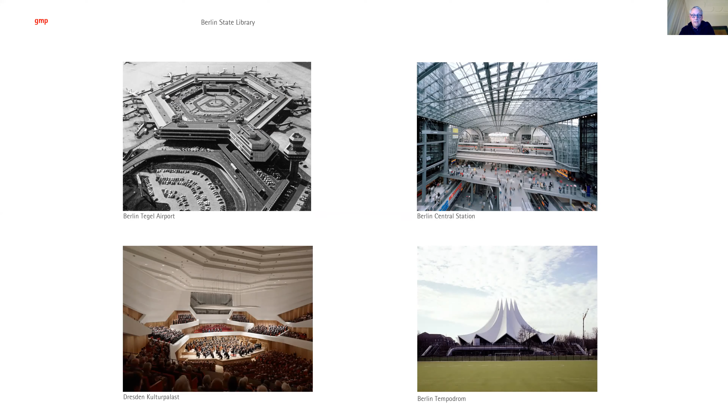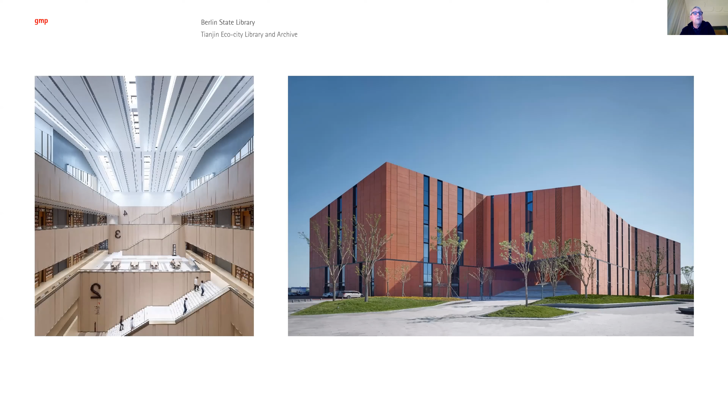And this is a quite interesting one. It's a library which is included and integrated in a bigger building coming from the 60s, next to a concert hall, exhibition spaces, and restaurants, a hybrid building in the city of Dresden.

In 1964, he won the competition for his largest project and his last project, the State Library in Berlin. This is this building, the bigger building in the background. He never saw the building completed since he died earlier than its completion.

Because of the deck-like terraces in the lower part and the big steamboat chimney on top, which serves as a magazine, this building is called the Bookship here in Berlin. It opens up to the west, where the architect Scharoun already realized the Berlin Philharmonie, great concert hall of our city, and where Mies van der Rohe previously completed the gallery of the 20th century.

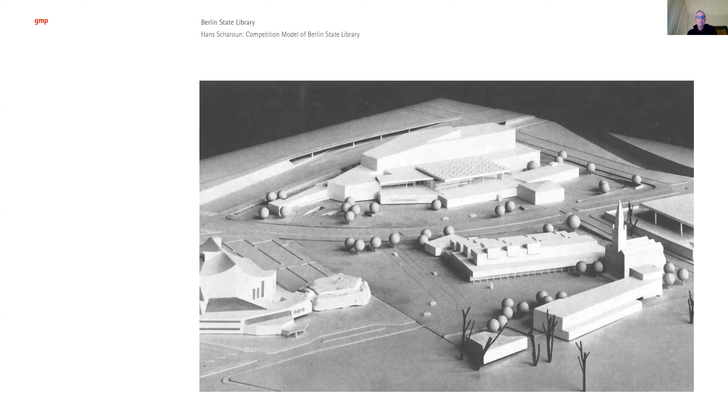The building had a clear backside where the extension of a highway was planned. And until today, this cultural forum we saw on the competition model so far is seen as a very critical urban project. Before the Second World War, this area was densely built, as can be seen on this picture, and the red frame marks the later position of the library.

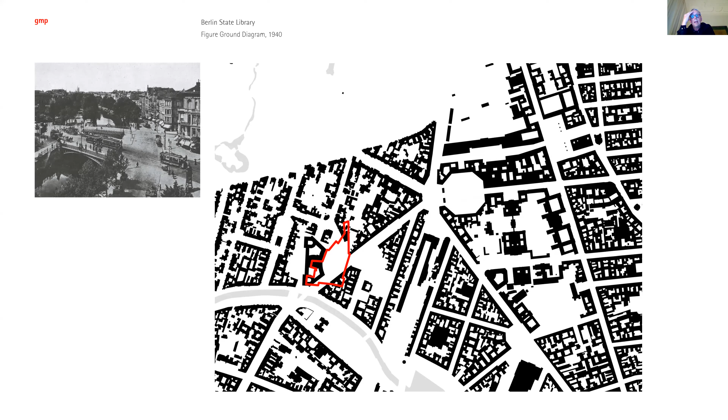Demolition in the Second World War made this area a vast place in the center of the city, a place that many different visions were conceived by architects and urban planners. Vastness is always a good start for visions, let's say.

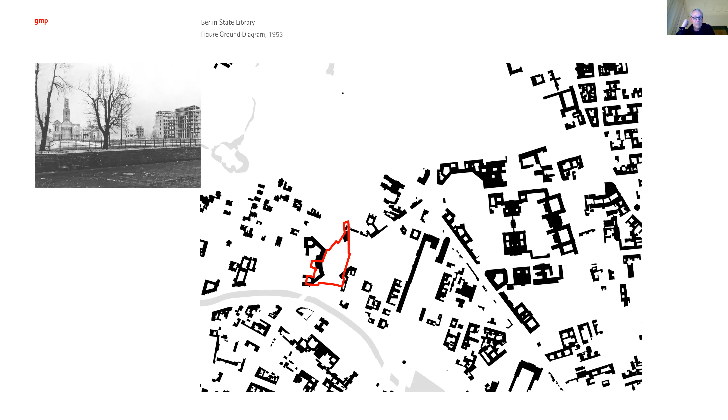The post-war planners broke the traditional city structure consisting of blocks, streets, and squares. Hans Scharoun proposed an open landscape-like space consisting of big solitaires, as seen in the model: the Philharmonie, the National Gallery, and the State Library.

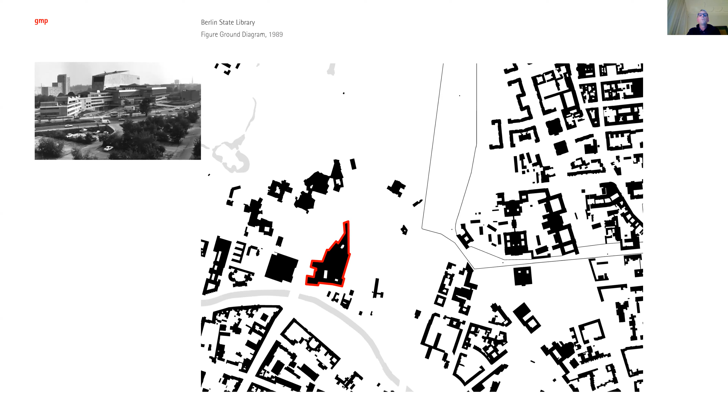And now we make the jump. We look at what happened after the wall came down, the Berlin Wall.

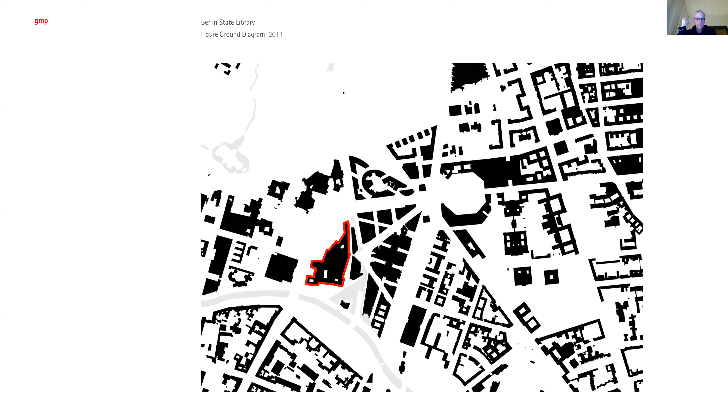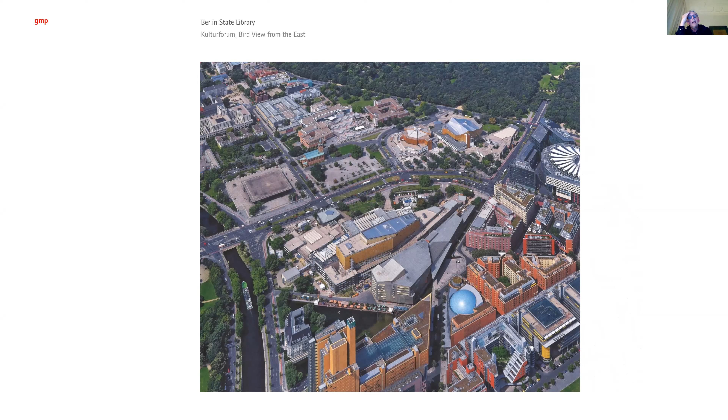The city structure to the east of the library was redesigned by architect Renzo Piano in a dense and compact way, so the position of the library in the city completely changed. He proposed a casino in a kind of back-to-back position to the library, and in this new arrangement he already thought about how to orientate the library towards his rebuilt new district to the east.

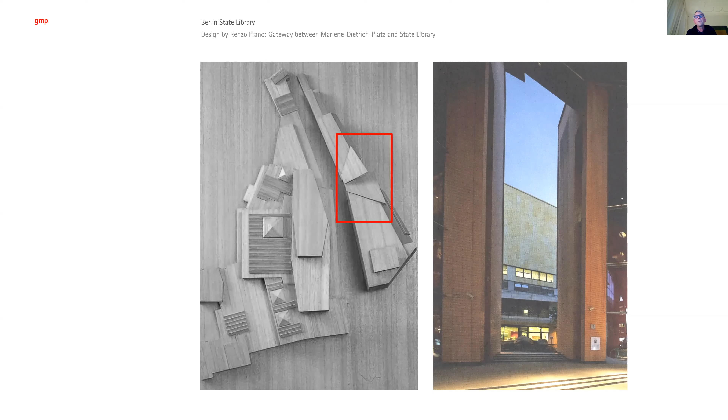That's why he built the most surreal gateway in Berlin. Once you come to Berlin, you can see that - on the right-hand side, a gateway to the backside of a big building. And once you pass this gateway, you find yourself in a quite desperate back street between two gigantic buildings.

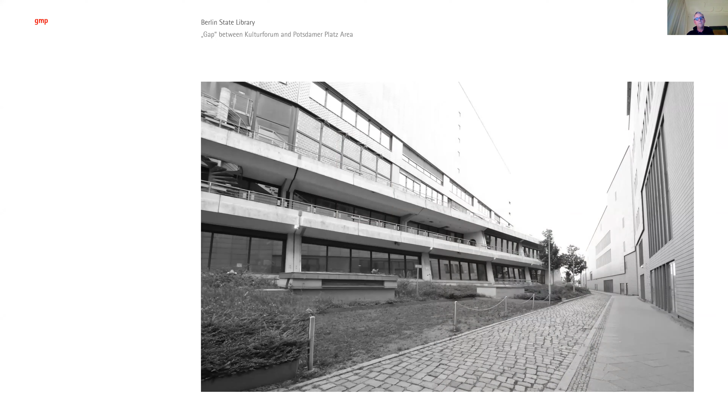But once you turn your head southward in direction of an artificial lake, this back street definitely offers some potential. That's why we redefined in the competition this outdoor space along the east side of the library. Here's a sketch, a very simple drawing showing that the sun is entering into this back street situation.

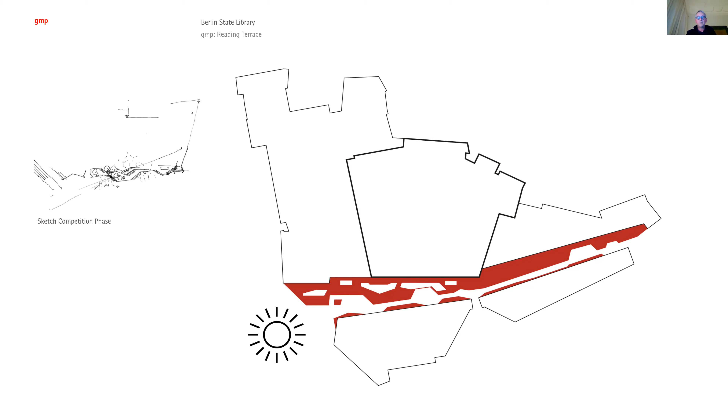And that's the winning scheme of our competition, which proposes reading terraces that activate the east side by connecting them with an attractive water feature in the south.

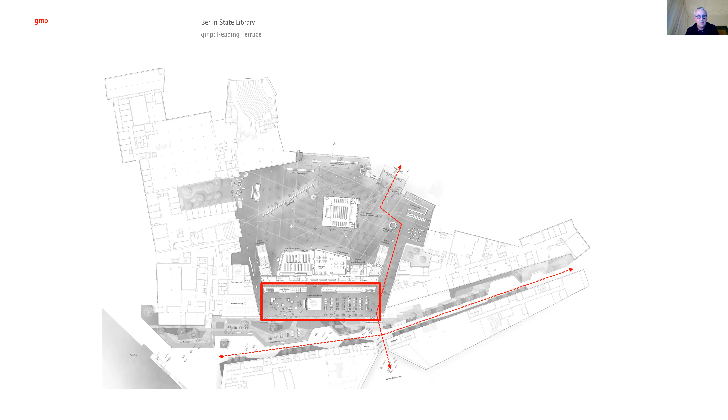So far, the east wing of the library was used for office functions. We propose to locate new functions there, like cafeteria and workshops along this side, in order to profit from the new reading terraces. The major intention of our competition proposal was to use the ground floor of the library as a kind of passageway between east and west, connecting the new reading terraces I showed you before with the existing reading garden on the other side.

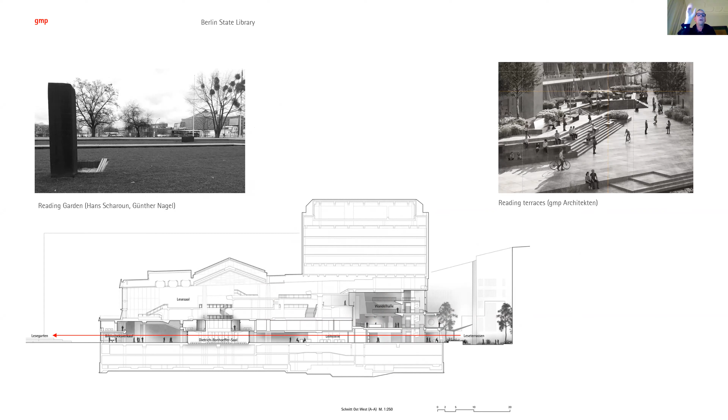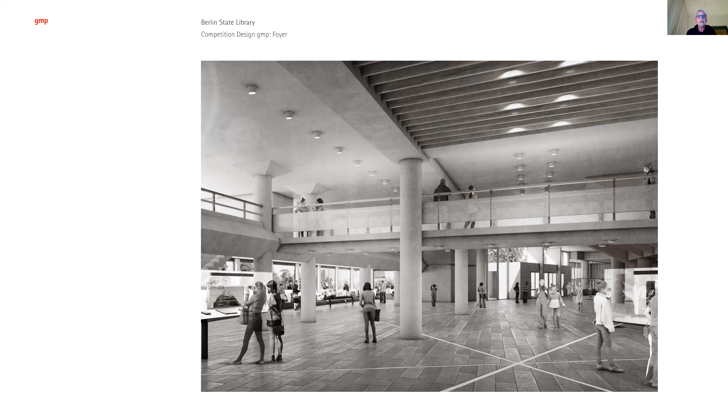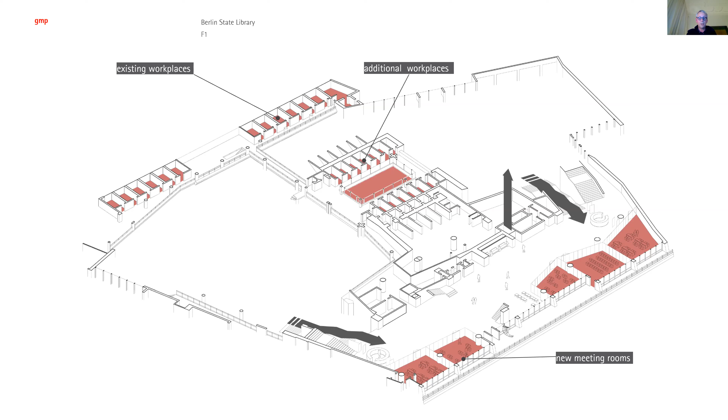Once you start thinking about outdoor spaces, you discover lots of them around and within the building, and you immediately start as an architect to think how to improve their quality.

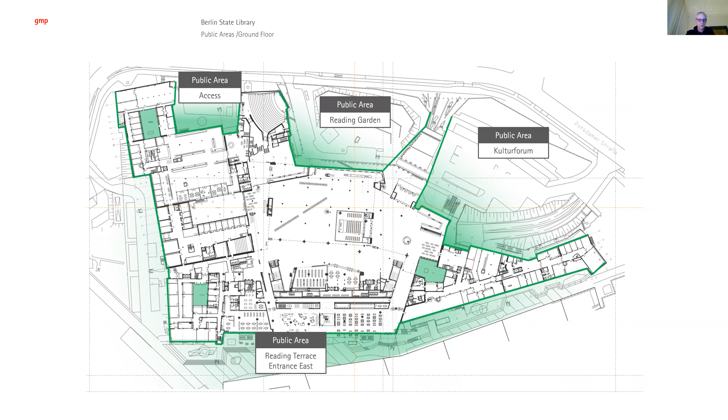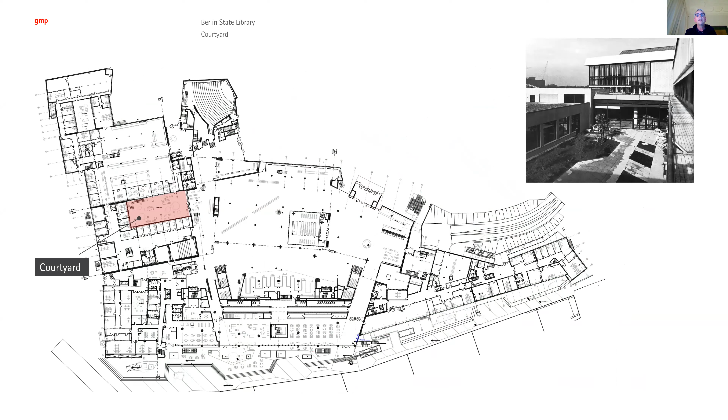Within the State Library, you find, for example, courtyards without any use so far. Even worse, they are obviously completely neglected by the librarians.

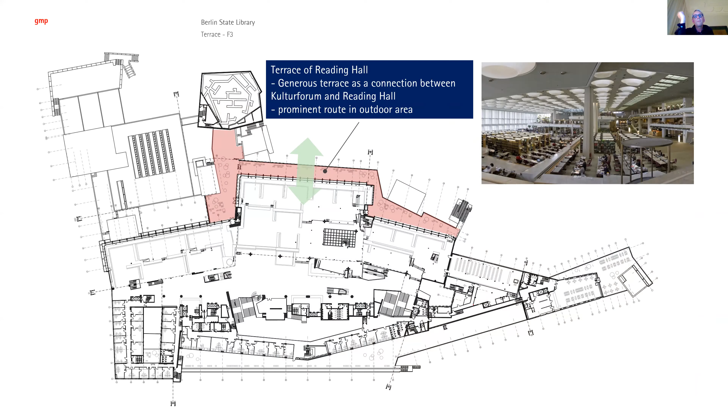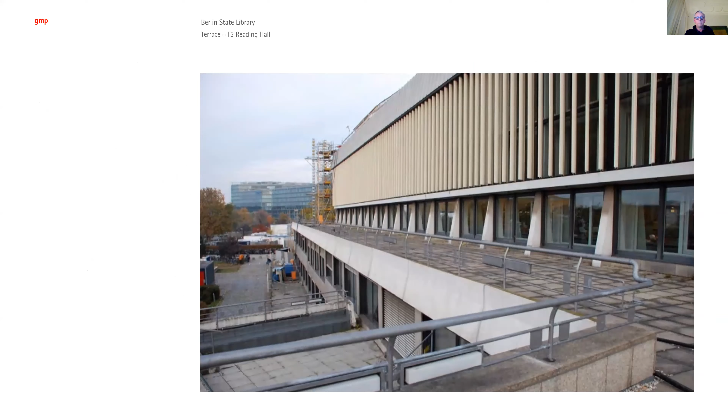And the bookship has multiple decks on different floors. This is the main deck, marked in red, in front of this beautiful reading room. But these decks were never used from the beginning on - they seem to be completely neglected, as I said before. I think that this ship-loving architect, Hans Scharoun, must have thought about reading on those decks, but reality couldn't be more different, as you can see on this picture.

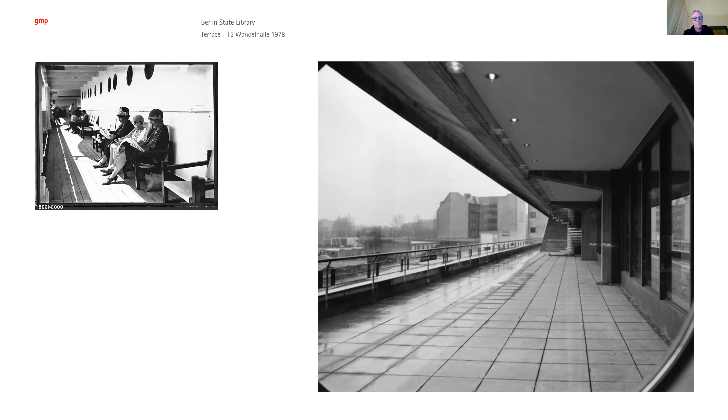Once we talk about this library and its outdoor spaces, we should definitely have a look at the cityscape within the Cultural Forum. A 6-lane road is cutting the library on the right-hand side from the rest of the Cultural Forum, so people are never animated to stroll around and to perceive this space as a cultural space.

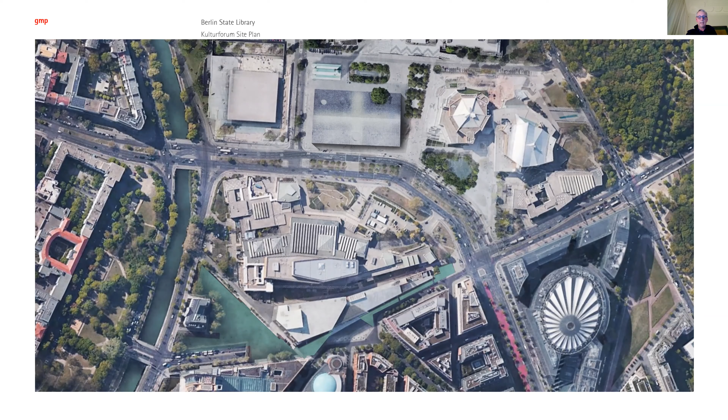The aerial photo shows the planned future of the Cultural Forum, where the extension of the National Gallery by Herzog & de Meuron - this square, rectangular building - is already included. Some months ago, I was asked by a newspaper here in Berlin to make proposals for the improvement of the Cultural Forum, and the idea was to slow down the traffic of this 6-lane road in order to create a shared space.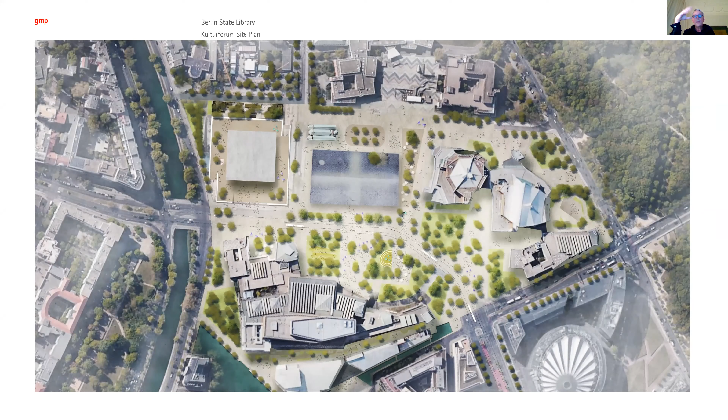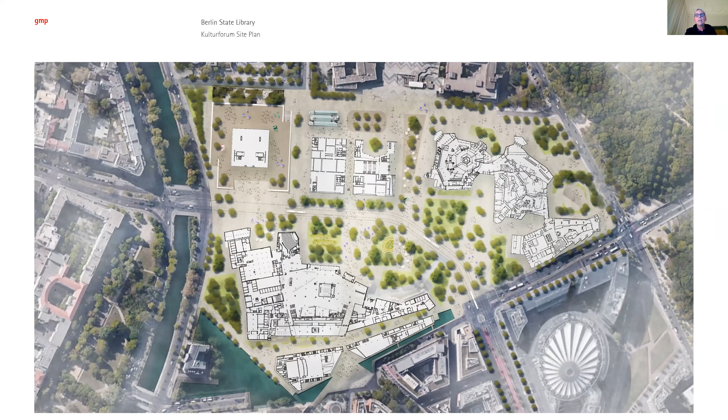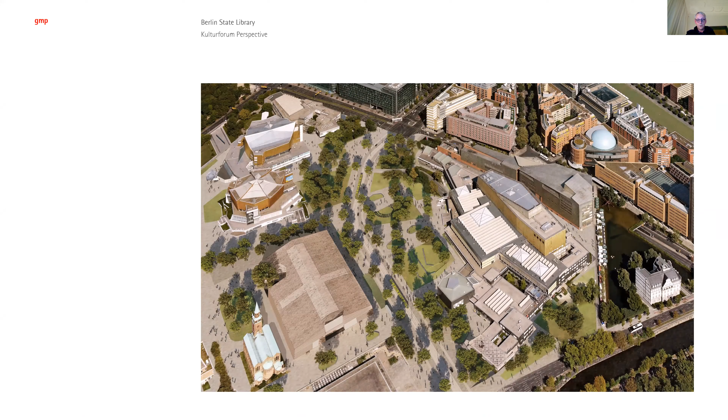Entrances would be related to each other, green spaces which link the big buildings. Fragmented urban space could then grow together, and the dominance of car traffic of the last century might be substituted by trams, bicycles, and pedestrian traffic. And so far, thank you very much. I hope you agree that library design matters, but their outdoor spaces matter as well. Thank you very much.

Thank you so much, Stefan, for your presentation of this exciting project. It is a very big surprise for me that you discovered terraces and balconies in a building we in Berlin all know for so many years, and you discovered these outdoor spaces and the opportunities you see in them. I have two questions.

My first question is about outdoor spaces, and I want to go a little bit deeper into this topic. What is for you as an architect, in this project, the meaning of life between buildings? You talked about this expression, life between buildings, which comes from the Danish architect Jan Gehl. What is the meaning for you of this expression, and what are the qualities and opportunities of public open spaces in general?

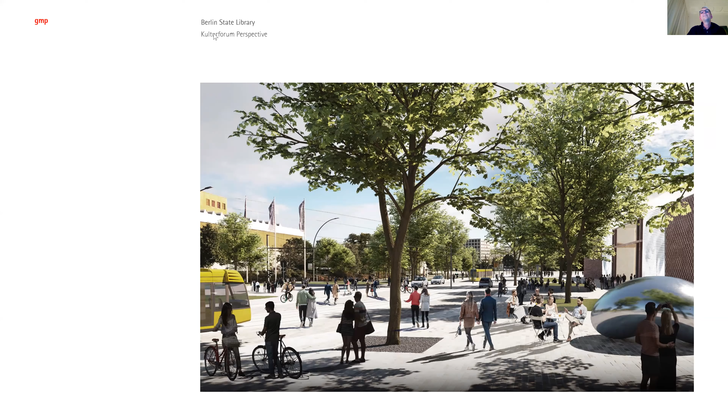Hello, I'm Marina Stankovic. I'm happy to be here and be invited to this very special discussion and little presentation. Thank you for the invitation.

Yes, I will maybe quickly introduce myself. I didn't actually make this part of the presentation, but I'm a Canadian citizen living in Berlin for a long time, running my practice here. We have a relatively small office, and we design with passion. We're not a commercial office, it's about passion. Working with our clients, discovering and treating architecture as a social experiment and giving it form is what we like to do, on a one-to-one basis or as a team with our clients. This is what we believe in as architects. So we're a very different structure than maybe Stefan's office.

Also, maybe just to introduce the project, it's a very different project than the one you have seen. It's not only in an urban context, in a completely different condition, but also on the other side of the world. So I will try to share my screen, just a moment. Let's see here.

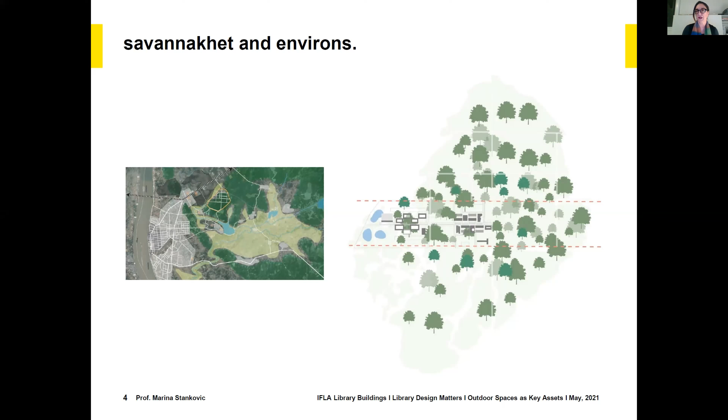The idea is to use the site in such a way that we stop further development and take away even more of the forest. So we created 3 zones in the forest, using the location of the campus to create areas that get reforested. At the same time, the chance is to create an architecture dealing with this very special condition of being in the forest - a bioclimatic architecture for this region.

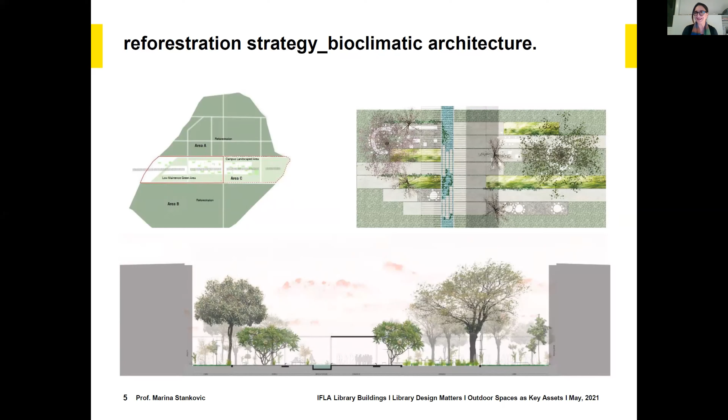This is what we found when we actually visited. We found out that the forest was gone, sold to neighboring countries interested in the precious wood. A few of the less precious trees were left over - these trees are huge, up to 40 meters high. They are amazing, you can fall in love with these giant trees, because I had never seen anything like this in my whole life. But the scale of what is left of the primordial forest is just amazing.

So our idea was to create a campus in this green forest that would locate itself underneath the trees, so it would never rise above the trees and bushes that would also have to be reforested, and to create a connected campus that doesn't occupy the whole site, but has only a very small, dense imprint on the site.

That would offer a connection between all the buildings on the site - covered connections, so that you could transit from one building to the other during heavy monsoons. But also, as you can see on the sketch to the right, create a series of enclosed and open spaces. The climate is generally very gentle and nice - the aggressiveness of the climate is actually the rain, so a lot of the outdoor spaces can be used also for teaching. The little drawing before shows the pathways between the buildings and how the campus is connected.

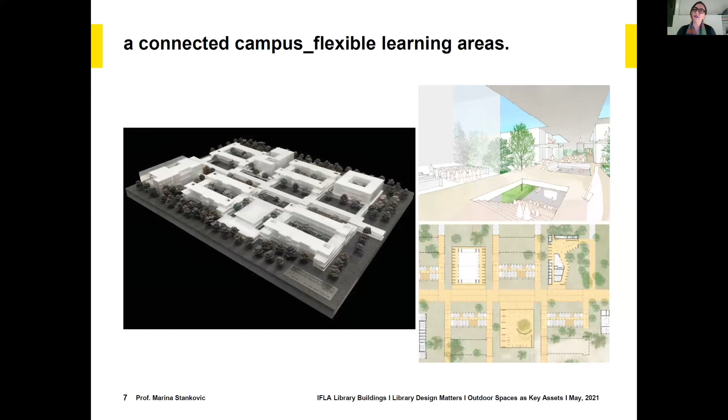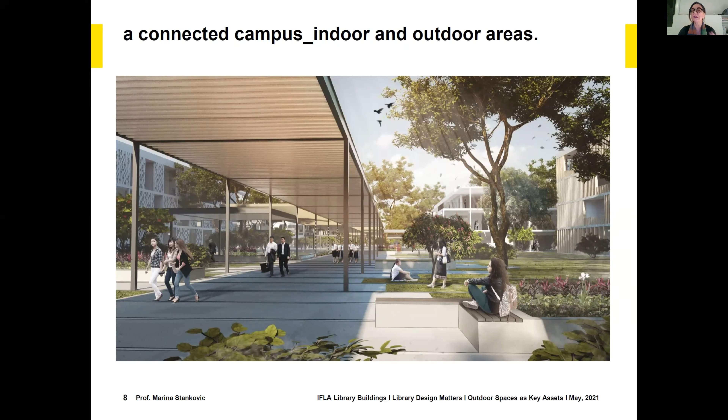So this is the kind of atmosphere that we're looking to create: covered walkways that offer easy connections between the buildings, outdoor spaces where you can meet with other students, read, study, but also then go to the buildings. As you can see in this axonometric drawing, the library building, which has the curve to the right, is actually respecting one of these very large trees, and its form is generated by the position of the tree itself. It is also at the front of the university, so it marks the entrance in connection to the open space in front of the building.

The paving is kind of blending into the landscape. It doesn't have strong edges, so that an amorphous open area can be thought of as an extension of the library space, but also an arrival point to the campus itself. In the little black and white axonometric, you can see the paved main axis of the building, the roofs connecting the buildings, the academic infrastructures, and the different faculty buildings.

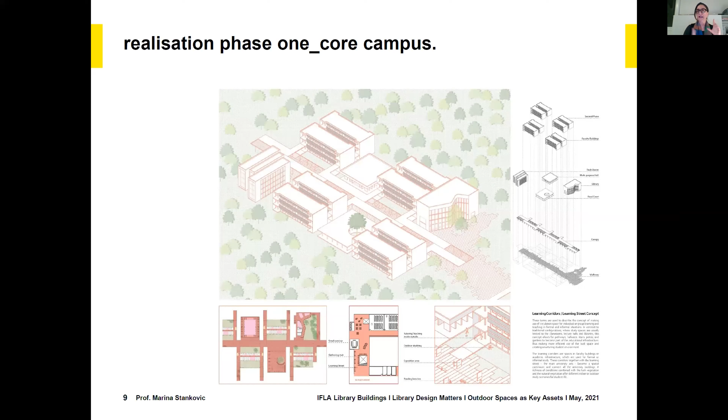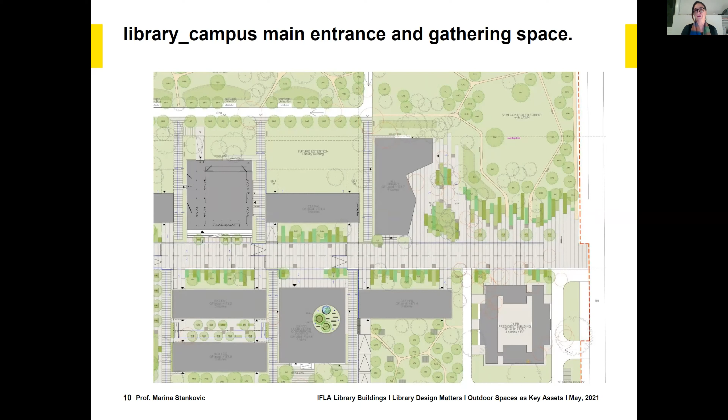We'll go to the next area. This is a close-up of the green area, so one can see how the buildings blend with the landscape and create little gardens and orchards between the buildings. These gardens will very quickly become very luscious because the nature is very beautifully aggressive there. You can see the library is the curved building on top, and it marks the entrance to the campus. Again, a lot of these buildings try to work with buffer areas between inside and outside.

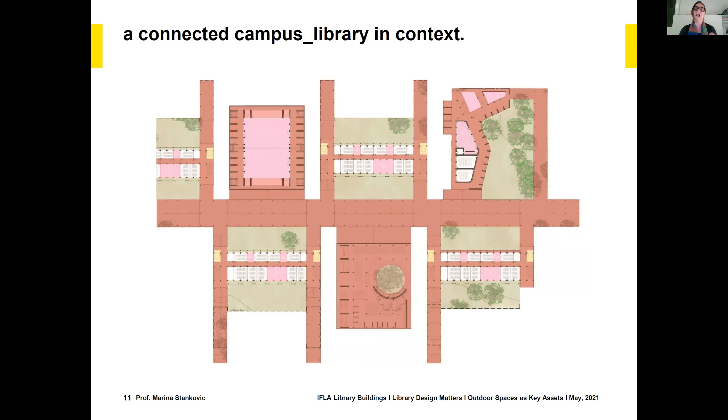For example, the pink areas are open areas within the buildings themselves, in order to allow the wind to come through the buildings and air the buildings. So we're trying to deal with passive methods of creating a good climate for these buildings.

So the bioclimatic aspects I can show in these three sketches. The idea is to create a building which is sensitive to its climatic context. We do this by thinking about energy efficiency, by using landscape, allowing shading in front of the buildings, and the general orientation of buildings. We try to think about the porosity of the buildings to allow wind to come through the building, through the open spaces within it.

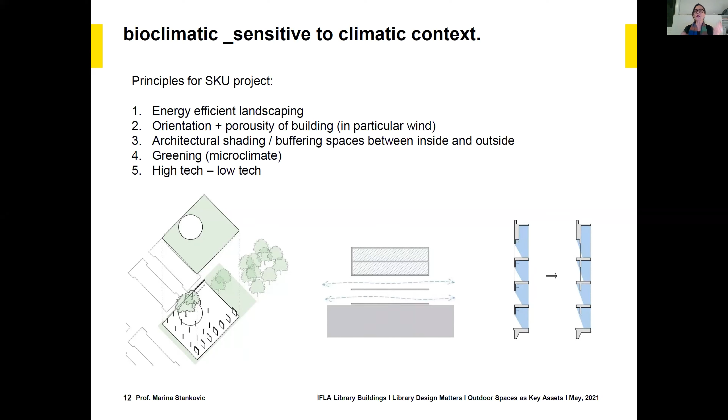We work with deep facades that offer shading, acting as buffering spaces between inside and outside. And we're introducing greening within the buildings, like biophilic design within the indoor space. A university of this size is for about 3,000 students with 6 different faculties. We have technical spaces, so we've tried to reduce the amount of air-conditioned buildings and simplified the others. It's always a question of finding a good balance between high-tech and low-tech buildings.

This is the library building seen from the walkway, from the general axis. In the section below, you can see the library is actually located on the top floors of the entrance building, and we use the first 2 floors to provide lecture halls, computer rooms, and generally open spaces for students to meet. We'll look at this in the next floor plans coming up. So the library building is combined with other usages, almost like a learning or student center, including all the other academic infrastructure buildings shared by the whole university.

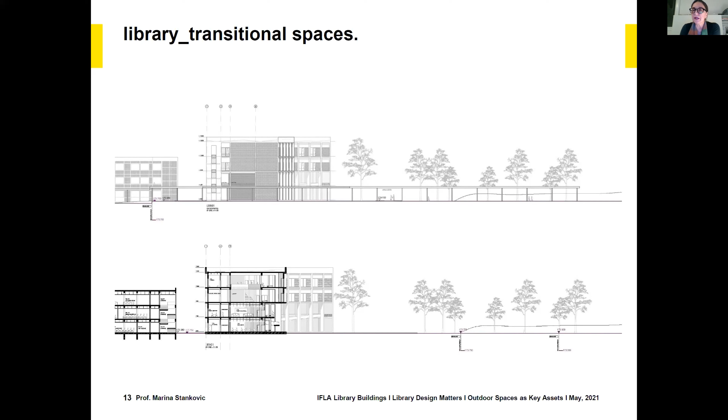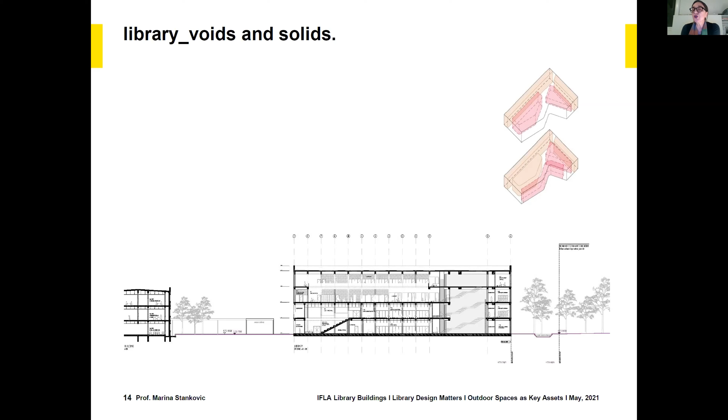Here you can see that the volume of the building on the top floor, where the library is located, has voided areas, creating a great hall for the library space. In turn, the library space is connected to the student lobby to the right of the building. The bottom 2 floors contain a cafeteria, computer rooms, a lecture hall, and a student meeting hall, all leading up to the library, connected by a ramp located around the curved facade, giving you an architectural promenade all the way up, offering views to the outside as well as to the interior spaces found within the building.

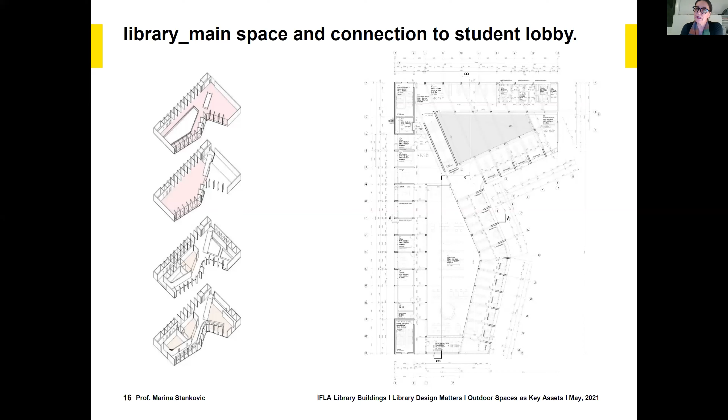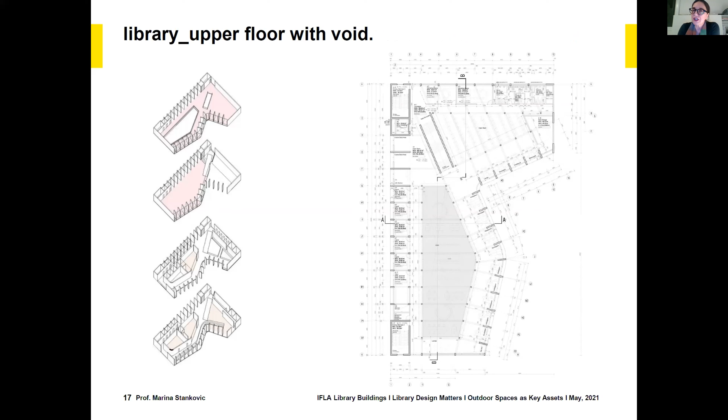What you can see in this floor plan is the library space, which has a void above. Within these deep facades, we've accommodated working areas slightly more separated from the rest of the library space. On the top floor, we have special working areas for rooms that students can book to work together, or conference spaces, and then storage spaces for the library stacks.

In the lower spaces, as I said, we have tried to create a community feeling in this building. So we have created cafeterias, lecture halls, and in the triangle at the top part of the building, this voided big hall, which is the student lobby space.

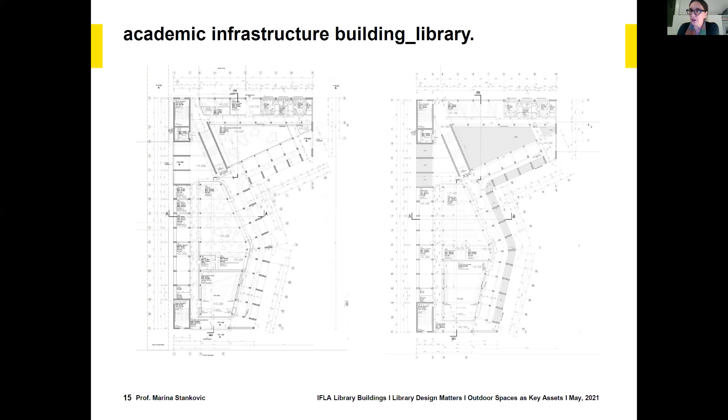Working in these countries, you have to also think about the building technology that is available locally. This is actually a very simple structure, spans of 5 meters, concrete constructions with teeny columns, not the normal norms that we have here in Germany or in the rest of Europe.

So we have applied this system to create the design of all the buildings, and we have infilled the structure with local bricks. Local bricks have quite a bit of special ways, special bricks that they make in this area. They look different and are very rough, but quite nice.

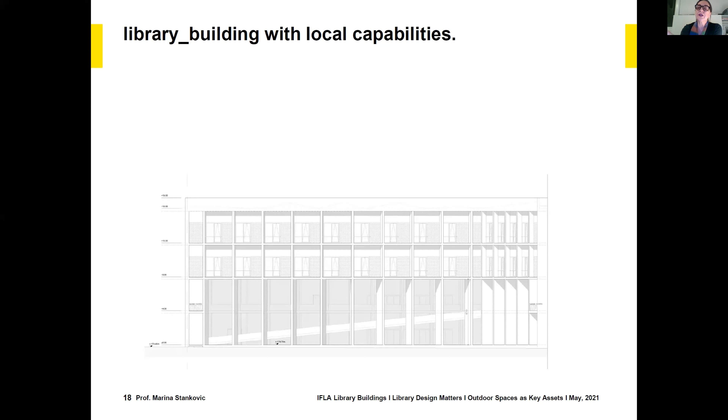So we're reusing them. And in this facade, you see the ramp starting from the left of the building, going to the first floor, and then continuing within the building to reach the library on the top floors.

In terms of materials, the materials are very simple. We have concrete, infilled brick, and a little bit of history from Mediterranean history brought to Laos by the French with the usage of the terrazzo flooring.

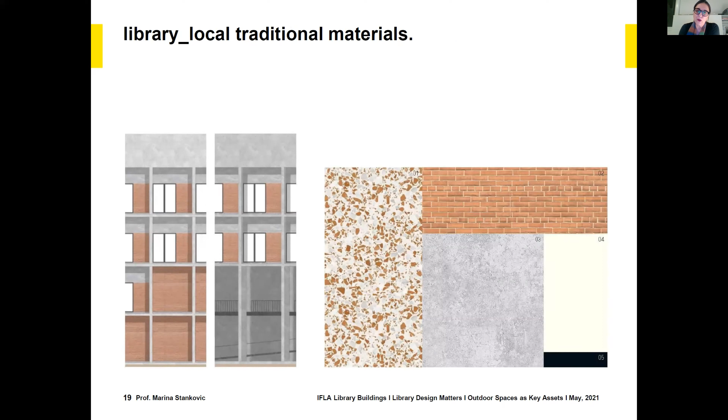So this is a very quick review about this project.

I'm happy to take any questions that Klaus or other people might have. Thank you very much, Marina, for your presentation of this, I think, very promising project in Laos, in Southeast Asia. Yes, I have a question.

You told us about your outdoor spaces and how you integrate this building in the surrounding, in this forest area. So we all could see that for you the outdoor spaces are more than a library garden or something like this. My question is going a little bit deeper.

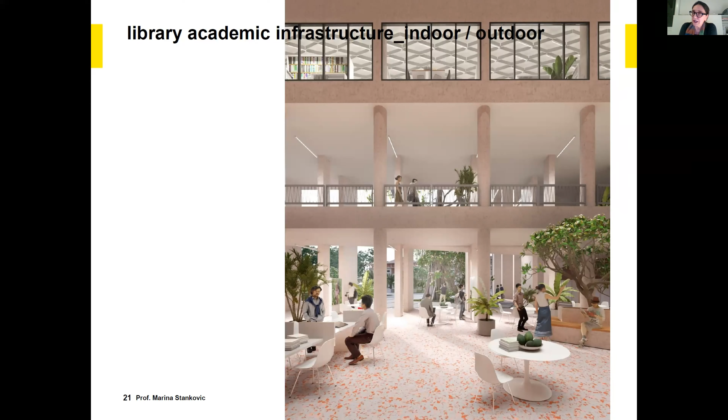Well, should I start? Yes, Marina. I mean, I think where we come from, we have a little bit more rain and snow, so we long for those warm climates because we can do so many more things outside than maybe we can do here. But actually, I do think that architecture can create the invitation by giving opportunities to meet outdoors.

Maybe even sheltered spaces to meet outdoors. So I think it seems like such an easy answer with the Laos project, and more difficult with Stefan's project, because we just have a very different climatic situation. So it's kind of unfair, I feel, for Stefan.

See how he handles it then. But also he's trying to create an invitation, an opportunity for people to use the space, to want to gather outdoors. And so I think that is the incentive that we as architects can give in order for the public to use. So let me hand it over to Stefan to see how he's going to draw people out into the Berlin outdoors.

Yeah, I fear that this question will come to me after a while. Of course, the State Library is a scientific library. They have very valuable books here. If you think about the treasures of this library, not to mention the autograph of the Ninth Symphony of Ludwig van Beethoven is there. Of course, you cannot take out a book on a terrace, because the librarians will hate us as architects if we suggest such stupid things.